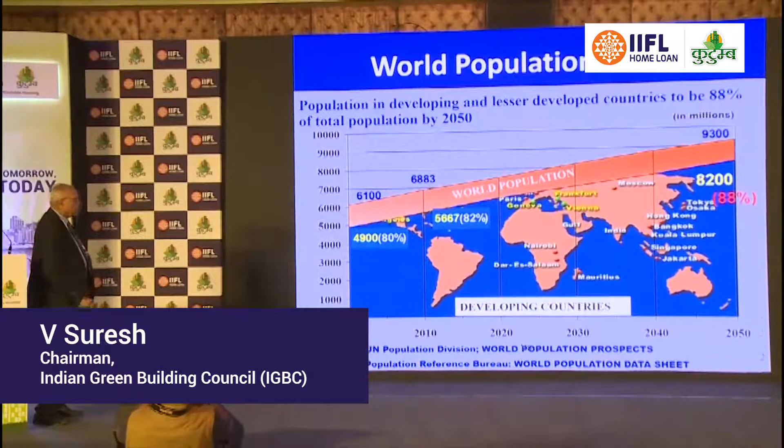We are about 2000, and by 2050 the whole world will be about 9.3 billion, or 930 crores. We are about 6 billion by 2000, around 610 crores. The blue represents all the developing countries where we are sitting, and the red is all the developed countries. Interestingly, the developed countries are going to shrink in population, coming down from 120 crores to 110 crores.

Their family sizes are shrinking. There's negative growth happening in most of the rich countries, whereas the developing countries are going to increase from 4.9 billion to 8.2 billion, which means 820 crores. This is where the problem is, going to increase from a small level to a big level.

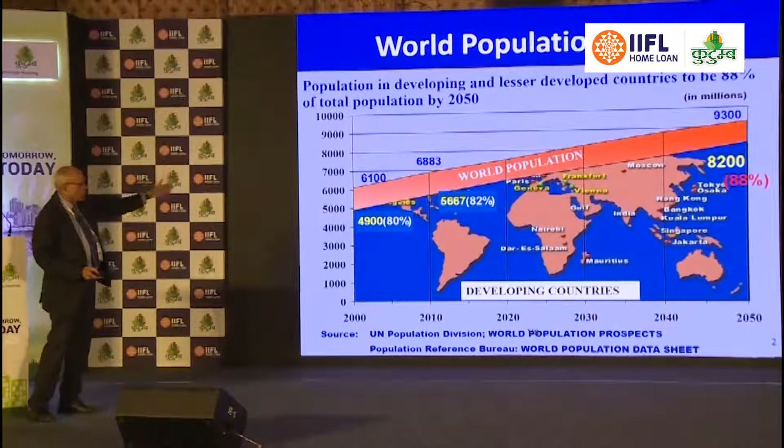They don't need any particular development because they're already rich, they have all the money available. So you've got to find out the type of resources required to deal with housing, water, sanitation, jobs, roads, hospitals, schools, whatever. All these are required as part of the development needs in a very large way.

And India is also coming up in a very large way. But we are amazingly going, the demographic push is phenomenally large. We were only about 100 crores in 2001, and by 2011 we were already 121 crores. We added 20 crores in about 10 years.

20 crores, or 200 million, added in 10 years, and we are going to end at 140. I just saw the population of India this morning. Would you like to make a guess what it is today? Just make a search - we are already 1.38 billion.

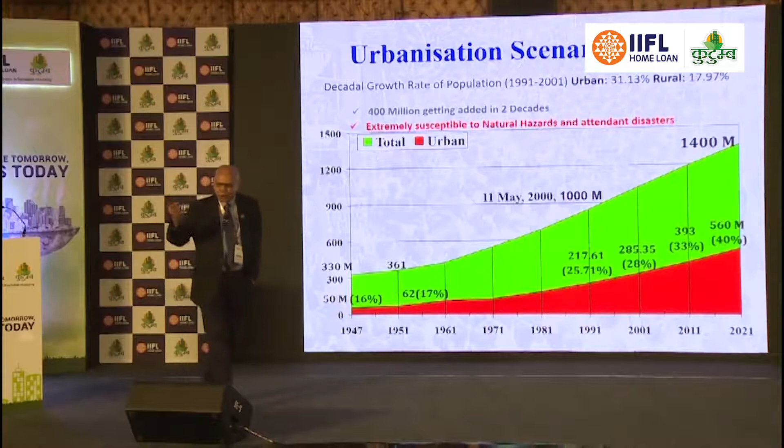We were talking about 121 crores as a good figure for 2011, and we are going to be ending somewhere around 1,400 million, or 140 crores. That means you're adding 40 crores of population in just 20 years' time period.

America is getting 1.5 times that added. America, with all its money, has only around 32 crores, or around 320 million population. What I'm trying to say is that the size is humongous.

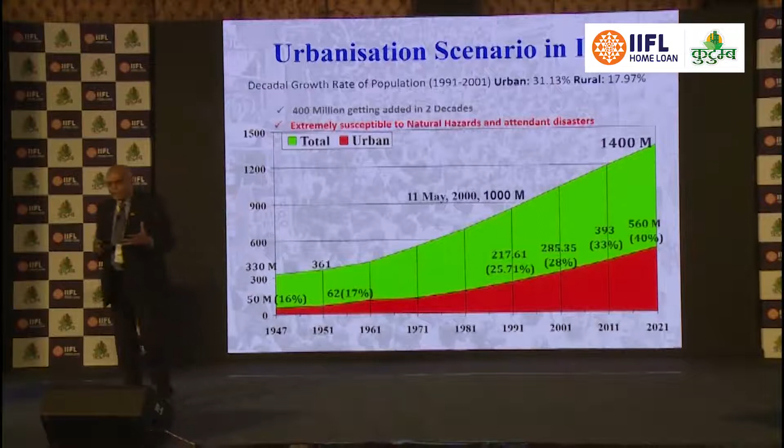The needs are phenomenal, and this is exactly where the urbanization trend is also going in a large way. We were 28% urbanization in 2001, in 2011 we were 33%, and we're going to be about 40% urbanization by the time the whole census comes.

So it's a phenomenal amount of need, adding around 40 odd crores in 2 decades, and also natural calamity and related issues are a major concern area. Some of those details already indicate it's likely to be about 60 crores urban only, by 2030.

This means a lot of money to be put in, adding 2 crores per year. You have to put a lot of buildings, you have to put infrastructure - building alone is not enough. You have to put the water line, the sewer line, the road line, the power line - all infrastructure has to come along with all the building. Housing has a building, office complexes have buildings, hospitals have buildings, schools have buildings.

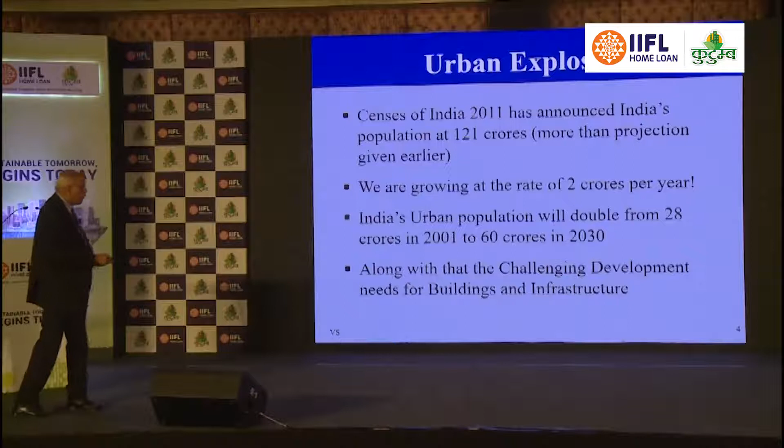All will have to get added on, not just the housing component alone. The biggest contribution is as a growth engine - 70% of GDP, giving new jobs. Housing and services in the urban context are important, and therefore these are also centers of productivity and social advancement.

Look out for all that growth. Chennai will go up, Bangalore will go up, Hyderabad will get into those particular 10 million cities. There are a large number of other cities which are growing. I entirely agree with Ashok in his presentation.

The growth rate is phenomenally high in these zones, and it has already come to 55 as of now. There will be 70 which will be more than 10 lakhs plus. But look out, you've got an equally important component of around 200 cities which are all municipal corporations over 5 lakhs and plus. 5 lakhs to 10 lakhs is also a very major component.

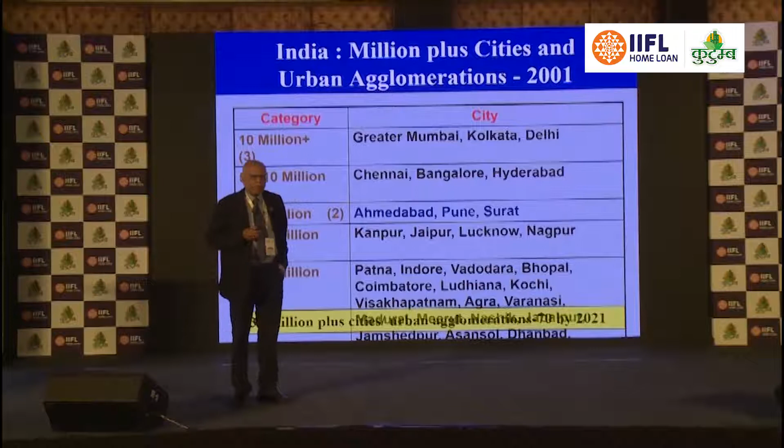So leaving out the 70 odd cities which are more than 10 lakh plus, or million plus cities, you've got to also concentrate on those cities which are 500 plus cities, over 1 lakh plus. That's all where the Amrut cities are.

The Atal Mission for Rejuvenation and Urban Transformation covers 1 lakh plus population, that's 1 lakh to 5 lakhs common, about 200 more than 5 lakhs. You've got a lot of growth opportunities coming in this particular area. Housing is the topic, therefore I'm leaving out all the other components there.

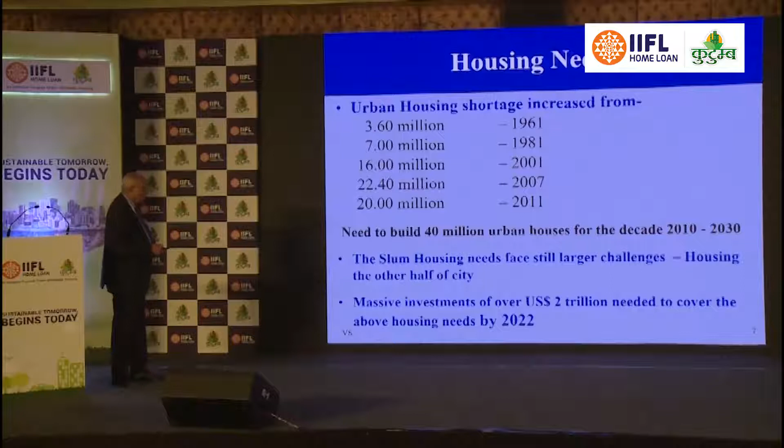We are aware of all these types of figures which are available. So we need to build, of the order from 2010 to 2030, around 40 million odd houses. Slums, the other half of the city, are very, very important. And therefore the type of money required if you want to do housing for all categories will be of this order, roughly about $2 trillion.

Now this is just India's snapshot. 20 million urban houses and 30 million rural houses coming. But out of that 20 million component, only around 11 to 12 million is being taken up by the Government of India under the Pradhan Mantri Awas Yojana, or PMAY, which is for housing for the EWS, LIG, and the lower middle income category.

But the housing for the country is not just that alone. So you provide all the other components also incorporated here. And therefore, as I have been telling often, I don't agree to this 95% figure that all housing for India is only EWS and LIG. I don't agree with that, because all the housing where finance is going is mostly MIG and HIG housing, and maybe a little amount for low income housing.

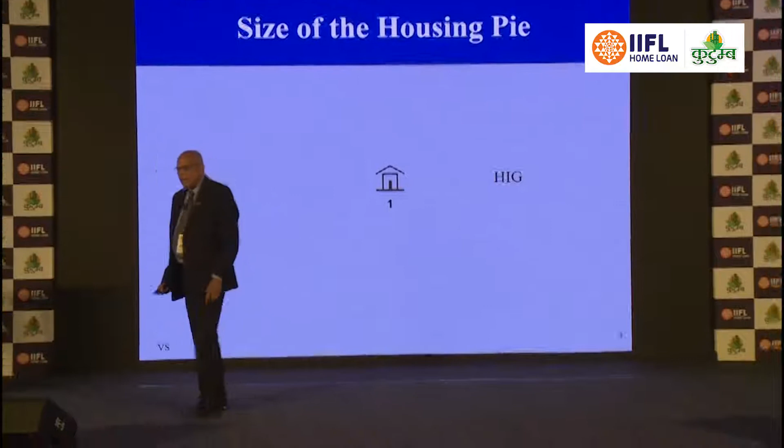If you talk about the 20 lakh crores of money which Monu has rightly brought out today in the presentation, how much of that 20 lakh crores has gone for the EWS? We've got to figure exactly 85% of the 20 lakh crores that has gone by all housing financing institutions, all the banks put together, has gone for middle income and high income housing. It is only a balanced amount that has gone for EWS and LIG.

Okay, so I've got this great data available in India: 10% of the housing, or one house for HIG, 2 houses for middle income, 3 houses for the weaker side/low income, and 4 houses for the weakest. That's 10. So if you break it down, that's 10%, 20%, 30%, 40%.

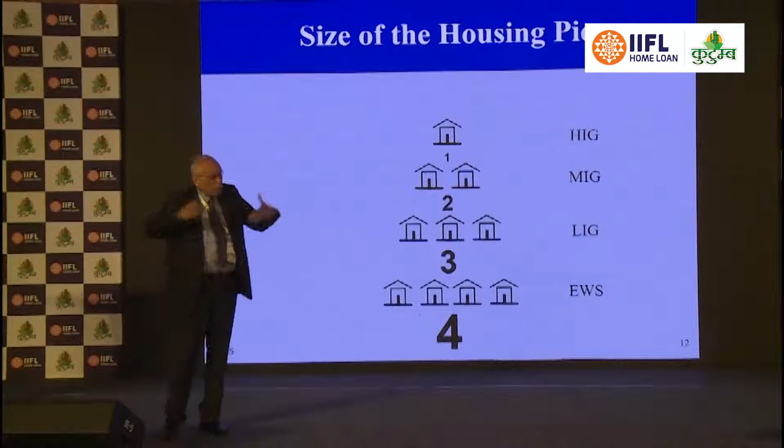I know there's a predominant requirement for that particular component, but the most important component—even this is a very big number—3 plus 4, that's 7 out of the 10 houses where no concentrated effort has ever gone in at the governmental level or any other level.

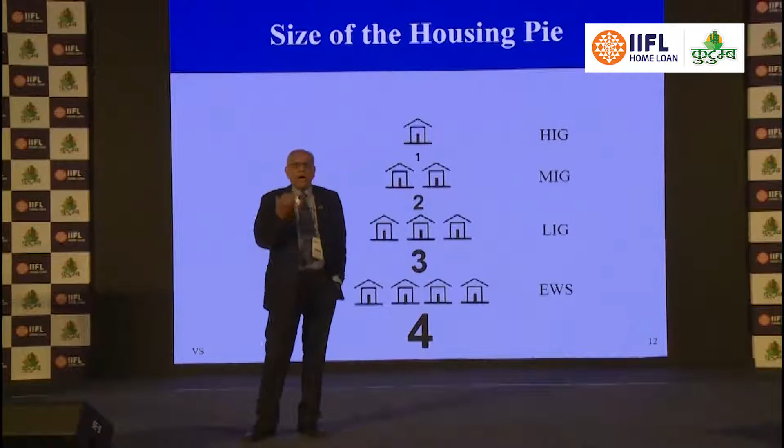Here's a major opportunity where you have brought in about 11 million houses to be done for the requirement of the weaker section and the low income category in a very large way. And that's important, and that's where these slides are very important.

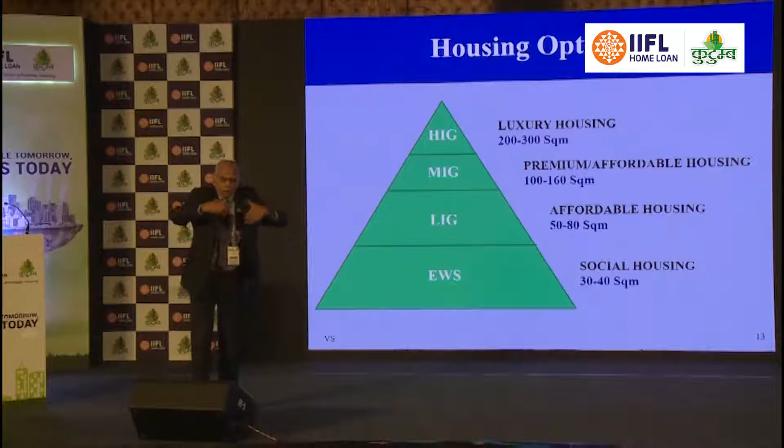A luxury housing of 200 to 300 square meters for high income, 100 to 160 square meter for premium housing that can also be affordable, or the real affordable LIG of about 50 to 80 square meter, and social housing coming at 30 to 40 square meter in this category, where the CLSS comes in. The credit linked subsidy scheme from the government is also dovetailed along with the component of interest subvention coming into the scheme, and that's a very major component also coming in the housing segment.

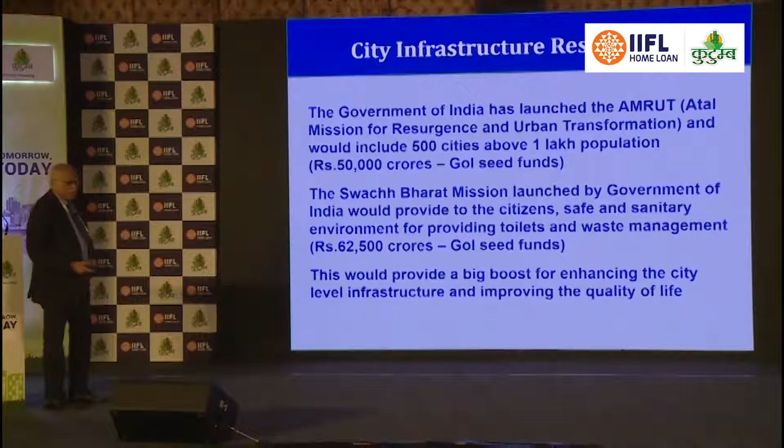Now a lot of interesting things come under the smart cities, also a very major component where housing will be coming in the 100 smart cities. You'll also be doing for the 500 Amrut cities—a lot of development coming, and there also a lot of additional housing will come. About, I told you, 500 cities will come under that particular level. I personally feel that's going to be a very critical area where a lot of housing is going to come.

It's not just Hyderabad, Visakhapatnam or Vijayawada - there are a large number of other cities where housing thrust is going to come in a very large way. And in the real estate component itself, if you see real estate developers putting all their money into everything, over 60% is going into the housing segment. Only the balance goes into commercial, IT parks, recreation, hospitality, entertainment, hotel and retail.

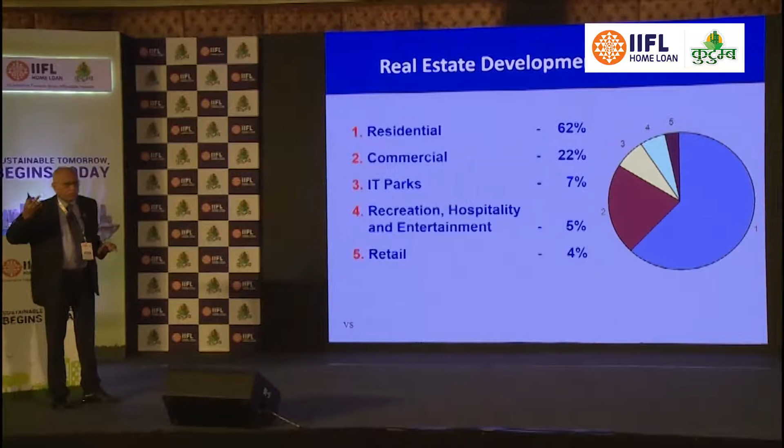So housing is going to be a distinct component even within that, but it'll be good for some of those good developers to have a good mix of all this, and not put everything only in a pure housing basket, because you've got a lot of viability coming in these areas with a mixed group, and cross-subsidization can also happen if you're able to link with some of the other projects in the area.

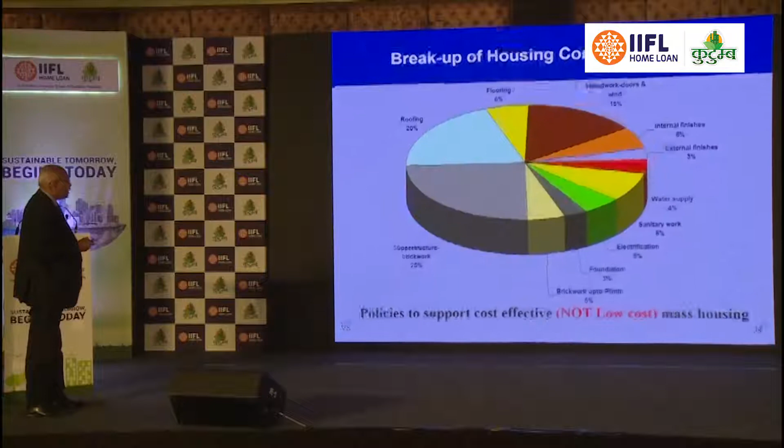Material and components information is already available to everybody, but I'm giving this so you can see where you can optimize. I like the presentation done by Supra - they've gone into very minute detail of where exactly you can start saving. Once you know these costs, the saving component has to be identified from each segment - how much goes for roofing, flooring, woodwork, finishes, external finishes, water supply, sanitary work, electrification, foundation, brickwork, superstructure. So you can really attack on this, and that's exactly what Supra has done.

Hats off to the excellent initiative he has taken to go element by element - how can you really bring it down? Cost reduction is very, very important.

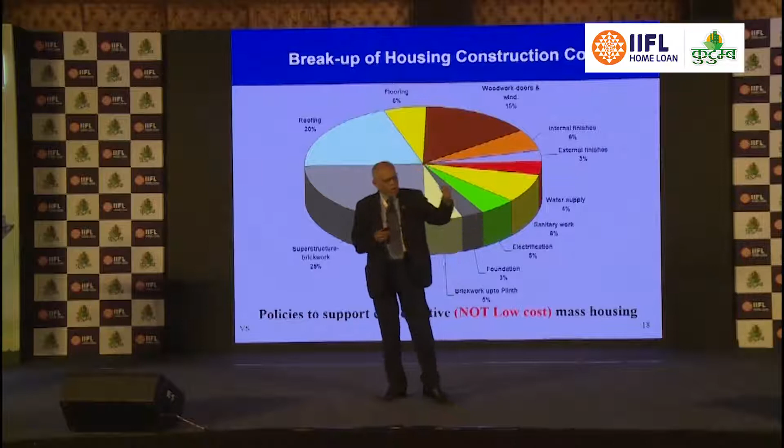We don't want low cost housing, which is a very bad word according to me, because that means low quality, only for the poor - it can be ugly, it can be non-durable, it may not last. What we want is cost-effective housing which is strong, durable, functional, aesthetic, and not an inferior option, but as good as any other option. So what Supra is doing is a super product, and that's the type of initiative we need to take forward - going item by item for each of those things, showing how you can work cost-effectively and not just low-cost housing, in a large way.

Another major area is disaster, and I'm very happy this was already brought out in Monu's presentation. It's a very major problem, very difficult to build houses for the poor and low income - once in a lifetime they are doing that, and once they do it has got to stand the test of time. You see all those problems with earthquake damages, be it Uttarkashi, Gujarat, Jabalpur, or anywhere, all the floods, cyclones, Orissa, Andhra Pradesh, etc.

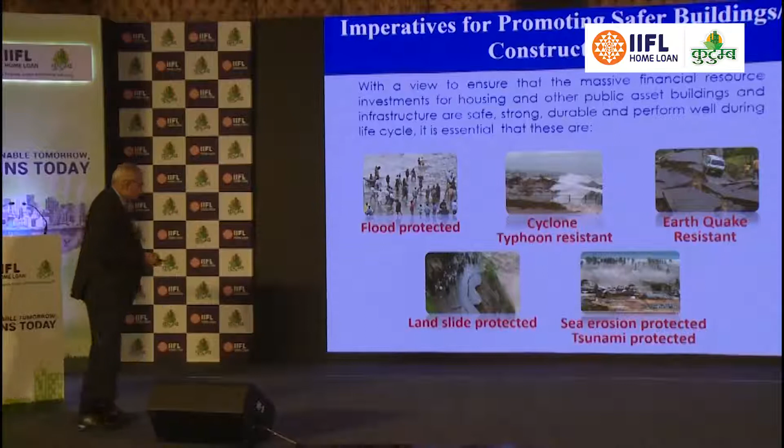So it has got to be flood protected, cyclone resistant, earthquake resistant, landslide protected - very necessary, this disaster mitigation or structural issue. You've got to make that building stand the test of time. The whole country is divided into various geoclimatological zones - seismic zones, wind zones, landslide zones, flood zones, etc. You've got to make your buildings stronger because you can't give an inferior option.

And more so, those buildings are all on a 15-year loan or 22-year loan. We don't want the building to fall in the 10th year - at least it should go into at least a 50-year lifespan or whatever. At least a 22-year repayment period is there, so the house should have at least the minimum life matching that durability. According to me, it should be of the order of around 50 years.

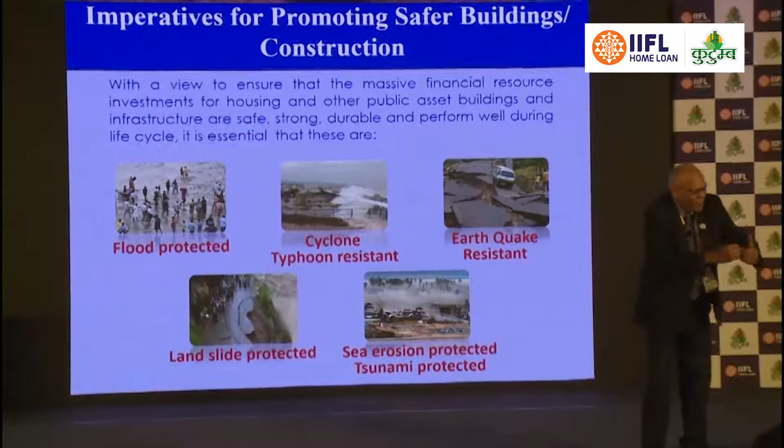It should be the minimum type of life that we should put, because I don't live in the house my father built, nor is my son going to live in the house which I built. So it also requires a generational link on how many years that family will live in that small studio house or whatever - when family size grows, housing choices also will be changing in a very large way. So you've got to take that component into account in a large way.

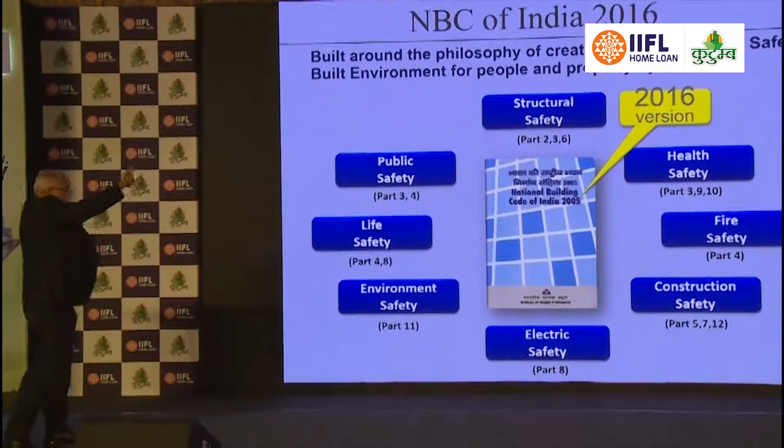All these are covered in a very large way in the National Building Code of India, where all these issues on structural safety, health safety, fire safety, construction safety, electric safety, environment, life and public safety are all covered.

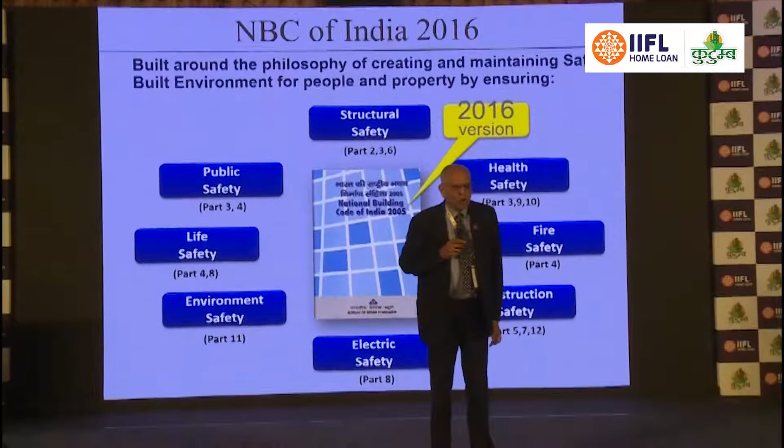Not only that, the new Part 12 is equally important because it also talks of building performance, assets and facility management. By the time the building is complete and you get an occupancy certificate, everyone's gone - architect gone, builder gone, everybody gone. Then I have to take care of this as a person living in the house. You know what I'm trying to say?

So how will it happen 5 years later, 10 years later, 20 years later, 30 years? What will happen to that? Is it performing well? So your important issue of maintenance comes in - your lift has to work, your water supply has to work, your plumbing has to work, your systems of solar power or whatever. To ensure that, you've got a new chapter which says don't think of the lower capital cost, but think of a 10 to 20, 30, 40 year time frame.

A life cycle costing component has come in there - capital cost plus operating cost or maintenance cost together. So would you like to give a finish which can last for a longer period, or a very poor one which will last only for one year? So you've got to take a decision on all your materials - walling, timber, doors, whatever - on how many years it's going to stand.

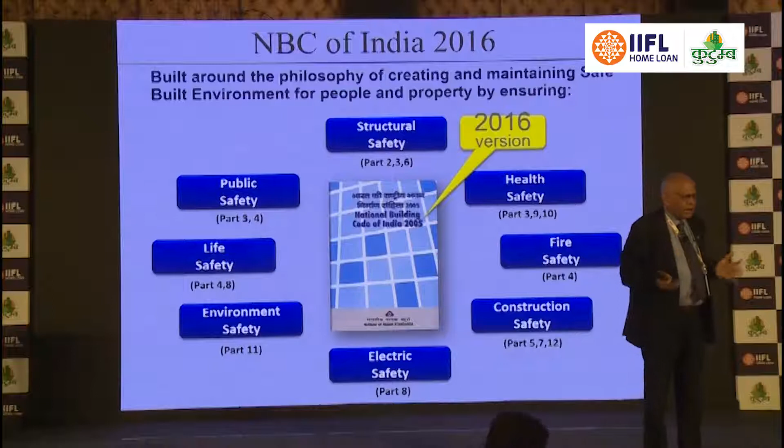And that also needs to be broken down: structural item, non-structural item, finishing item, service item, because each will have different lives. Your services won't have the same life because you change lights or fans or plumbing systems or pipes or wash basins every 10, 15 years - these things will go away. But the finishes, like flooring, will last a little more time. The structural system has to last for a much longer time, so the lives of these things also differ.

So these chapters will bring a phenomenal amount of useful input on how to deal with design based on life cycle costing. That's part of the building code. Normally we don't bother about that - we just do present cost, kya hai. We don't worry about what will happen to maintain that particular building.

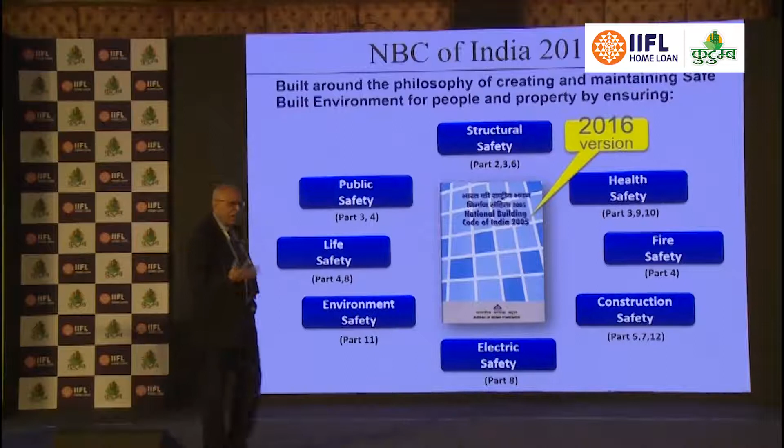So select those specifications in your housing product carefully, because very rarely can individuals who buy a home from a builder continue to maintain it themselves. Especially if it's an apartment, it's not an individual decision - it's a collective decision of 100 people together, or 16 people, or 20 people, whatever. They may not be able to arrange the funding to take care of continuous maintenance related issues. So we have to take that also as an important component.

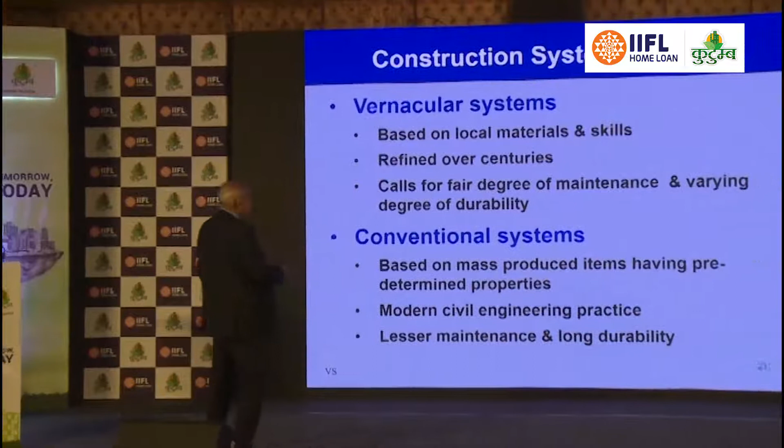Now, technologies are different on that. There are so many cost-effective technologies, the latest ones, which Anil brought up, and we got an excellent example with Supra. What are the conventional things you're doing, versus the Supra option? So comparing conventional technologies and cost-effective technologies - what are the new cost-effective technology options by which you bring down construction cost without sacrificing any functional or performance characteristics? Very important - there's a big list of that.

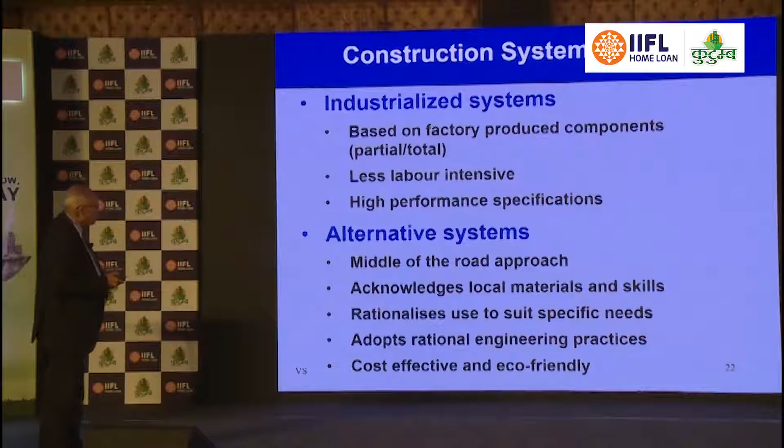It can be a topic discussed for a whole day, but I'm not going into that area in detail. There's a vernacular system using local materials, a conventional system using what we think we can do in the present way, or an industrialized system using factory-made products. Today I went and saw a major alternative system. Each technology will have its own particular option. It depends on whether it's a small town, a village, a medium town, or a big city like Hyderabad - how much traditional components we can use versus technological components using steel, cement, brick, concrete.

This is where we are - we are only able to use the right side of the brain and not the left side of the brain.

Okay, we don't want to get into this particular area. So we need a combination of some traditional options and some technological options. It can be 100% purely technological using steel, cement, bricks, concrete, or you can use some vernacular methods. It can be a good combination of adopting what I call intermediate, cost-effective and disaster-resistant technologies. Very sustainable. That's what really makes it affordable.

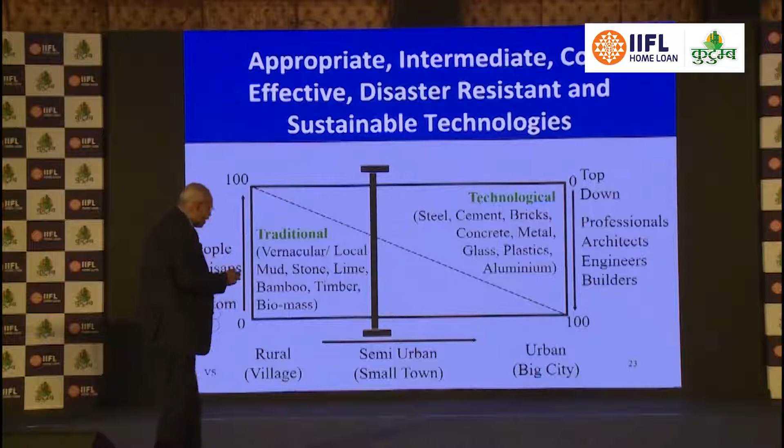And cost is going up. Construction cost is going up year on year. Cement bag, steel bar, your aggregate, fine aggregate, not the onion price. So all these things are going up. The onion price will be at the wholesale price index going up, or the average income might be marginally going up. But interestingly, construction costs increase at 50% more than inflation.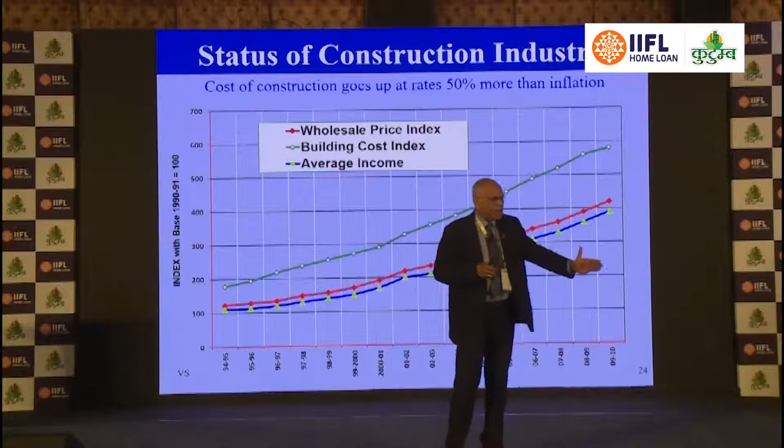If your inflation for your country, for your city is going to be of the order of 4%, 5%, or 6% inflation, your construction cost goes up by 9% annually. Because steel, cement, brick, tile, all the 275 building materials that go into the component are not included. I repeat, not included in the wholesale price index or consumer price index. They are not included. So based on what we have, I kept track on how many years.

So you've got to really see: if affordability is marginally increasing, salaries of people are increasing marginally, cost of construction is going up even larger. So the gap between cost and affordability is widening in a large way. So it's a bigger challenge.

Architects, engineers, builders and real estate builders find it very difficult. Therefore, how do you give a product at a cost which people can afford? Like he said, a sense of pride. No advertisement, I felt it, but people come because it's still within their affordability range. So affordability becomes an important component when you deal with housing in a large way. So you've got to really work on that.

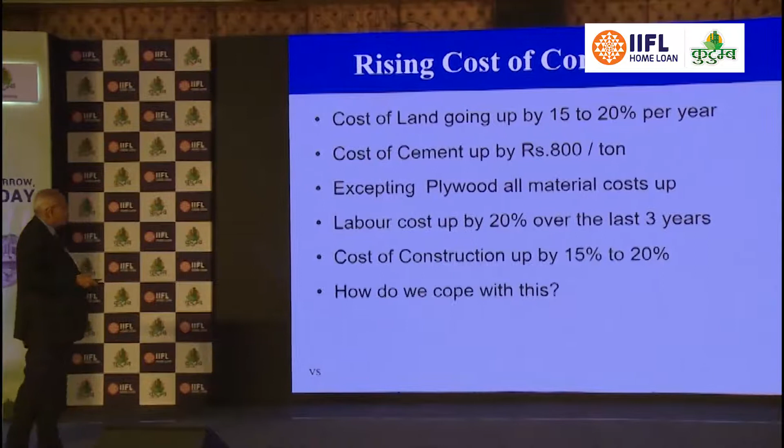Steel, land price going up, cement price going up, excepting plywood, all prices have gone up. Labor cost is a phenomenal component. Construction cost is still going up higher. So how do you deal with that?

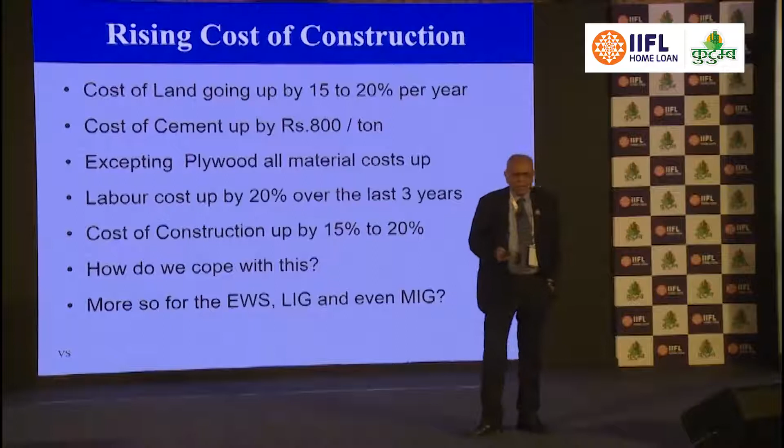Not only did we think the problem was only EWS, even middle income housing has become very difficult. To have a middle income housing going for 1 crore, 1.5 crores, come on, whether it's Bombay or Delhi, anywhere, that's not an affordable home under any sense of imagination. If your average income is only around 1 lakh to 1.5 lakhs per month, or maybe around 12 lakhs to 18 lakhs per year, you can't get into a housing product which is costing around 1 crore or 1.5 crores, but that's the only product available.

So you've got to have a lot of options to bring into this particular area. We've got technologies by which things can be strong, durable, functional - each word has a meaning. Aesthetic, environment friendly, ecologically appropriate, energy efficient, affordable and adaptable, cost effective and appropriate technology for construction. It's easy to say, but that's where I liked the way the presentation came. Some of those options can be there, and I like Ashok's latest technology by which you can make the construction, the walling material, bring in a substantial amount of savings.

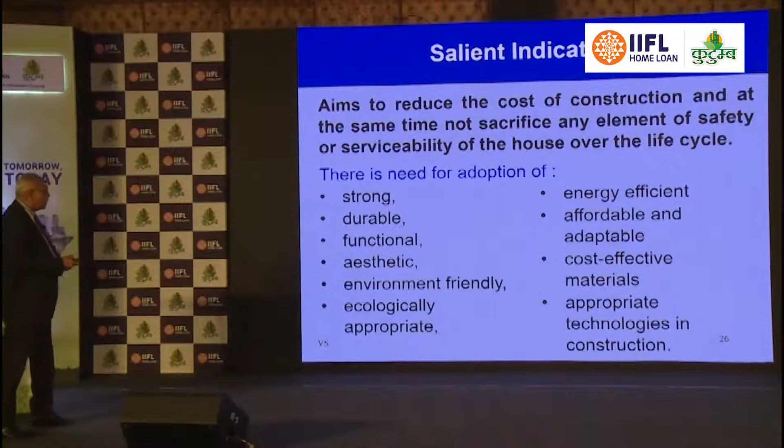Lot of things are there. There are new technology options, I don't want to go into the list there. There are a lot of problems. Aggregate is a very major problem there. You don't get sand for construction. Even coarse aggregate is a very major problem. So what solutions are coming in these particular areas also becomes an important component.

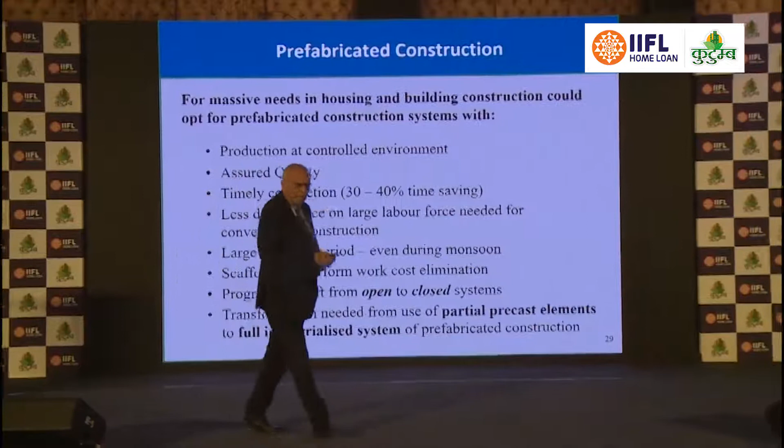Prefab is also catching up slowly. I was today morning from 7:30 to 9 o'clock visiting a project, about a 28-story building in Hyderabad, which is made entirely - all the columns, beams, slabs, staircase, everything is precast, prefabricated, just coming from 550 kilometers away, and they are completing one floor in 15 days. Each of the 28 stories has come up in less than about 12 months time period.

That will also catch up. I'm not fully for it because it's also energy consuming - anything you produce requires a lot of equipment and machinery. Construction is also a way by which a lot of employment is generated. So I'm not for the high-rise component, I'm for the low-rise, high-density component of development.

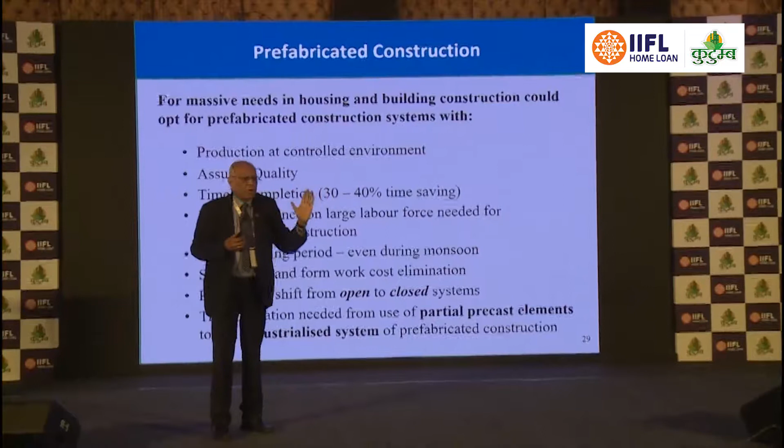Funding is another major component - a lot of interest. I'm happy to get Neha to come into it and bring in some more direction. We require equity, debt, construction-related inflows, working capital, interest servicing, and we require funding at two levels: one is developer level for them to put the construction finance, and the other is required at the level of the home loan individual into retail finance.

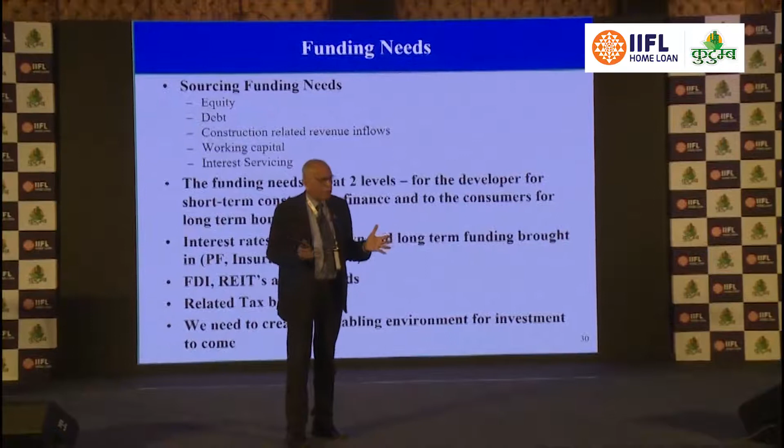I did say how even the 20 lakh crores worth of money that is with all the housing finance institutions and banks - I was just given to say 85%, or 86%, of that money has gone only for middle income and high income housing, and only a balance component has gone for EWS and LIG. And that's where the biggest - therefore I salute you for the type of money that you have put across to the large number of people you have indicated. It's a very major contribution to what I call the down-marketing of credit for the poor.

It's very difficult, not easy to do, because most of these people don't have - as one of the interesting components I liked - most of them don't have regular jobs. So they can't easily show a monthly EMI proof that I have so much amount of money available. It's not easy to do that. So you've got to assess that.

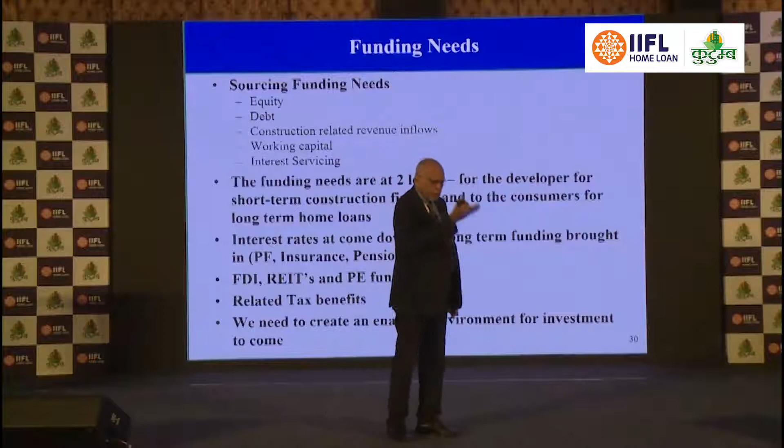Each one of your youngsters, men and women who are dealing with those individual 70,000, 80,000 people you have reached out to, you've got to make an assessment of what their income should be. Because they are in the informal sector, not the formal sector type of jobs. So they don't have land in their name, and therefore you don't have a mortgageable asset. But still, some of them are starting your work - it's not very easy to get into this particular level. So that money is an important thing.

But I'm glad you use long-term home loans. For example, even if you get bonds, Neha, your biggest problem is going to be that all bonds are 5-year or 7-year bonds. India has never had any bonds which are more than 10 years, whereas you have to lend for a long period. Let's say IIFL uses bonds to get resources other than deposits - then you get an asset-liability mismatch between short-term borrowing and long-term lending. So you've got to give back money to the depositors or the bond market, and you really need to see how you're going to deal with that.

Bonds are a good instrument, especially for city-level infrastructure or related areas, and even agencies can take that. But you require access to long-term funds. And one of my pet topics is that just like the US has solved this problem...

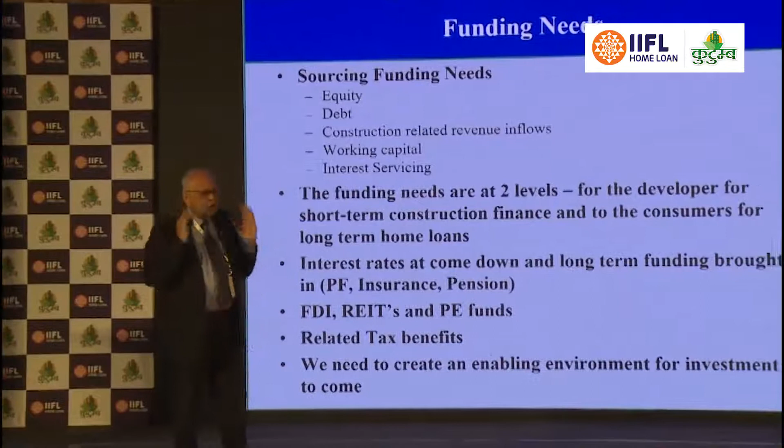Of course, we've briefly discussed how GST has come down - it's already come down in a very large way. From the latest figures, the Prime Minister announced just about 4 months back that affordable housing GST has come down from 8% to 1%, and other housing has come down from 12% to 5%. It's a very major component.

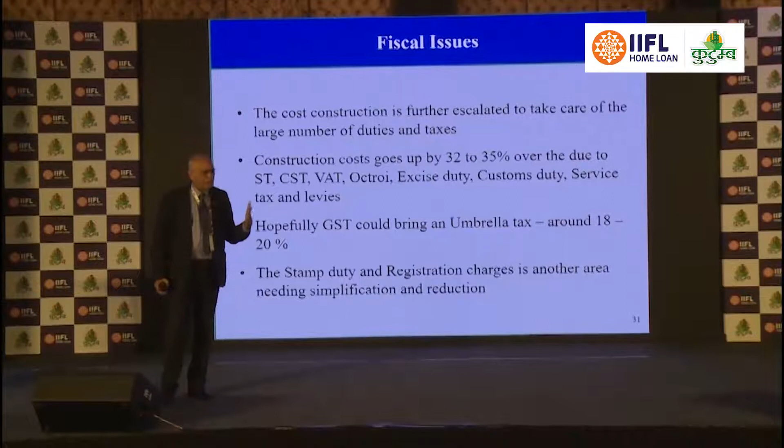Some of the products you mentioned - whether those can be completely off GST, like new innovative products. As Ashok said, we can make a case at the right time, because the budget is coming in February. This is the right time to push all those innovative ideas which could have zero GST on those particular input costs. We can find out those particular areas.

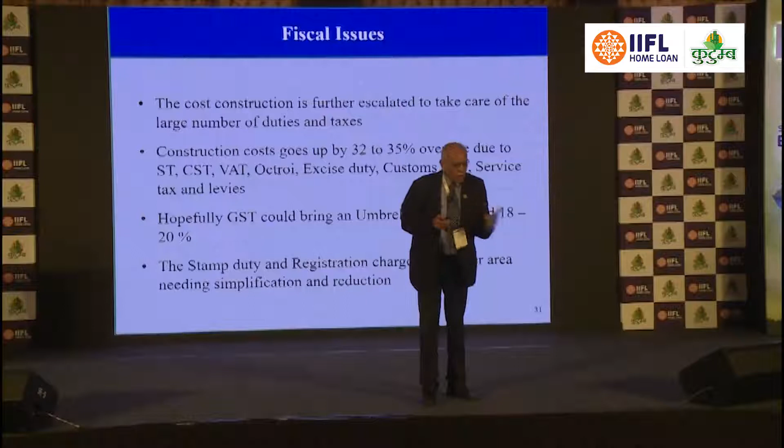No stamp duty required, no registration charge if it is a house up to 400 square feet. Kerala is a good example where there's no registration, no stamp duty for registration. It's a very important document. One good thing is that all the new documents for home loans under the PMAY has to be in the joint name of both the man and woman, the partners of the home. It was not like that before, and therefore that will be an area where registration of the document becomes an important component, and what type of costs can be reduced in that area is also important.

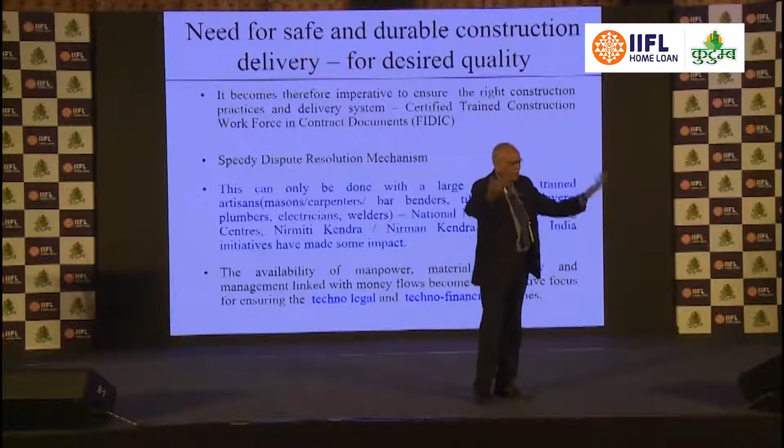Now, a lot of related issues that I don't want to talk about. Our way of doing work through contract documents, the training required for masons, ensuring good quality for doing 20 houses is one thing, but doing 200 houses is different, and 2000 houses means you're scaling up. You're going through the contracting system, and trained workers are not available - mason, carpenter, bar bender, plumber, electrician, all those skilled trades. We have a terrible skill shortage in this area, because quality at the end of the day depends upon all these things put together.

Another thing I mentioned about maintenance and related issues - a good building, as covered in Part 12 of the National Building Code, where assets and facility management are added, you've got to take into account the cost of life cycle costing and the type of requirement to keep the building up. Just like our own body - the exercises we do, the nature of food, day to day, for our skin, bones, whatever - the same thing is happening in the building.

If you don't invest roughly 1% to 1.5% of the capital cost of the building, that has got to necessarily go into housing maintenance and related components. That's why they put a 40-year depreciation level for buildings - at 2.5% depreciation each year, 40 years is the life put for the building to write off. So I'm talking in terms of at least a 1% level, if not 2.5%, has got to be put into this segment.

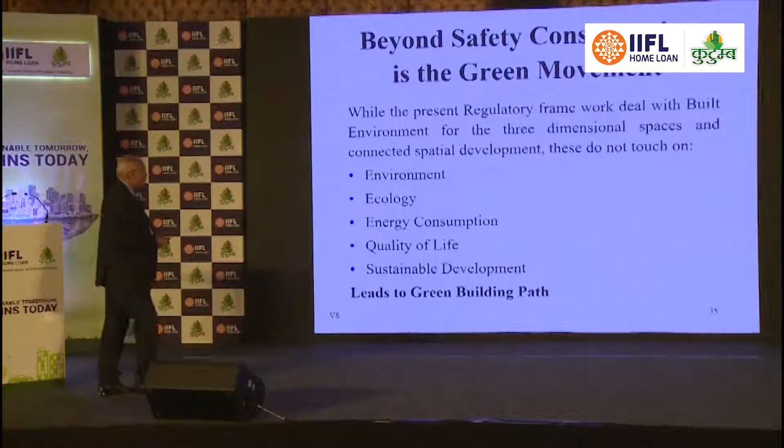Now, if you do all this, good quality will come, good health issues, good safety consideration will come, then you will be able to really get a good amount of projects with commitment from the whole team. But according to me, that's not enough. I talked about all the safety - structural safety, health safety, fire safety, public safety, all construction safety is not enough. You have to go beyond safety concerns, and that is where environmental issues, ecological issues, energy consumption issues, quality of life and sustainable development become important.

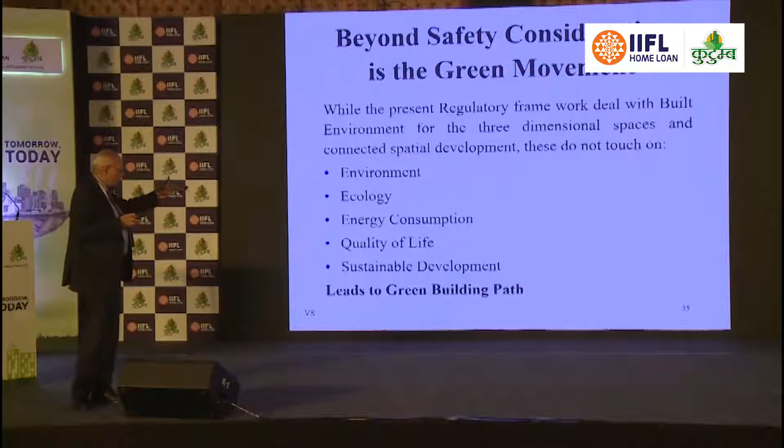And this actually leads us to what you call the green path. The green - we did not talk of green at all. All we talked of was housing affordability, cost of construction was the only thing put forward. And therefore this component comes in. That's where I like Supra's presentation and Ashok directly telling that you combine all those concerns which normally were at the level of only safety and related things, but also the concerns of the green agenda on water, on energy, and incorporate that in a very large way. Let us really go into this path.

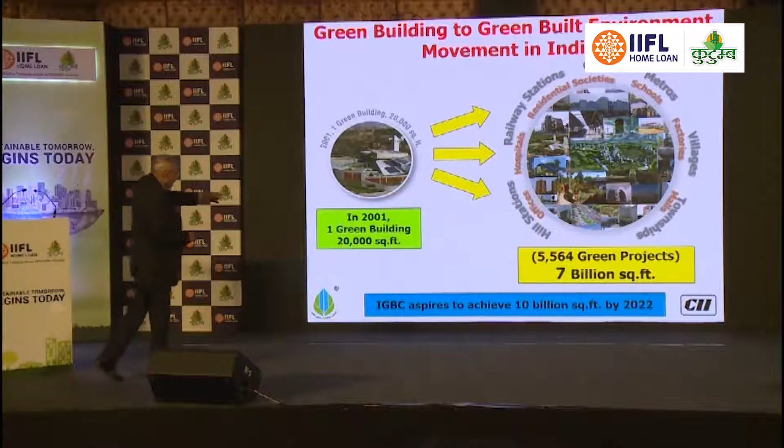What do we do in that? That's where Indian Green Building Council, which we started in 2001, we have come a long way for sustainable built environment for all. We are part of the World Green Building Council - around 80 odd countries are part of that, and we are contributing in a very rich way in this segment. We just started with one building, which was mentioned by Amor - you people should visit that depending on time, because since all of you are from Hyderabad, our team members are all there today and will be very happy to show you the interesting initiative done there. We've come a long way from that one building of 20,000 square feet - today, I'm very happy and proud as an Indian that we achieved 7 billion square feet.

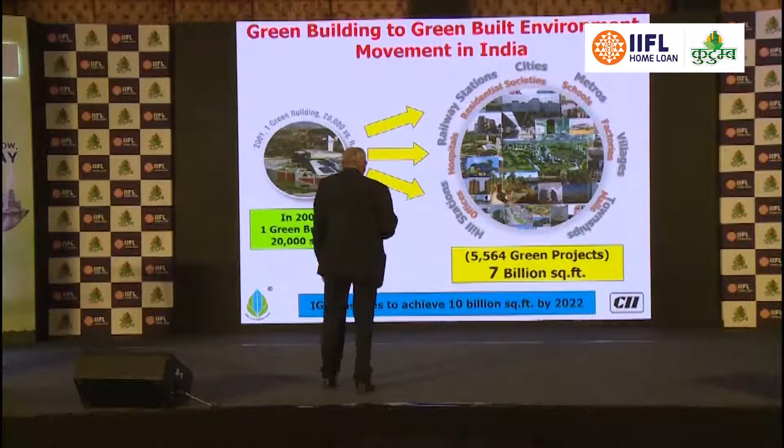That's 700 crore square feet of green footprint that has come with over 5,400 odd projects all over the country, and that's a very major achievement. We are number 2 in the world, and very shortly, by 2022, 3 years from now, when India becomes 75 years of independence, we'll be at 10 billion square feet, or 1,000 crore square feet of green footprint.

That's the type of work we are working on. We have 25 rating systems available. If you see commercial, all your commercial buildings are covered. Residential, we've got 3 rating systems available, I'll talk about that a little later. All your metro stations are a major one, and the built environment is for the campus and cities.

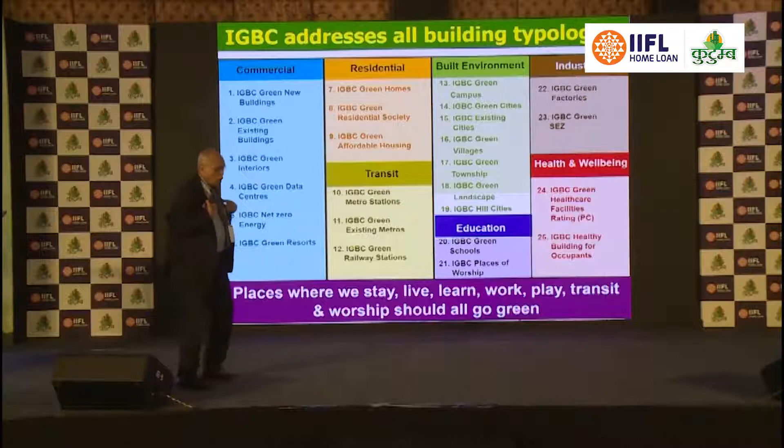We are the first ones who went beyond green buildings to green cities, because all other ratings just rate a single building - platinum or gold. That means on a whole street you might have one such building, a whole city might have maybe 20, 50, or 60 buildings. But imagine extending that to the built environment - a green campus, an existing city, a township, schools, hospitals, industrial buildings, well-being centers, and metro systems all have ratings. So therefore, we are interested in this particular area.

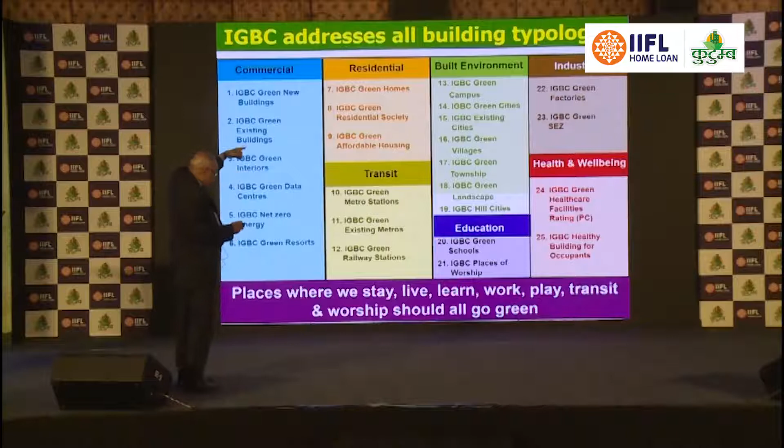So we have 25 rating systems, unlike most other rating systems like USGBC, LEED, or TERI GRIHA, where it's the same vanilla rating used for a commercial office building guzzling energy, a school, or a hospital. We don't do that - we do it separately, because each use of a building has different levels of consumption of energy, water, and other components. Depending on that segment, the rating system has been designed. That's a distinct feature of why IGBC is separate, and that's why today we have 92.8% market share of all green building ratings in the country.

We were the first ones to start, more than 12 years back, with the first rating system, version 1. You can see the ratings and how we've kept on updating the versions. This one is for the green home rating, normally for high income and middle income housing, with a little for low income as well.

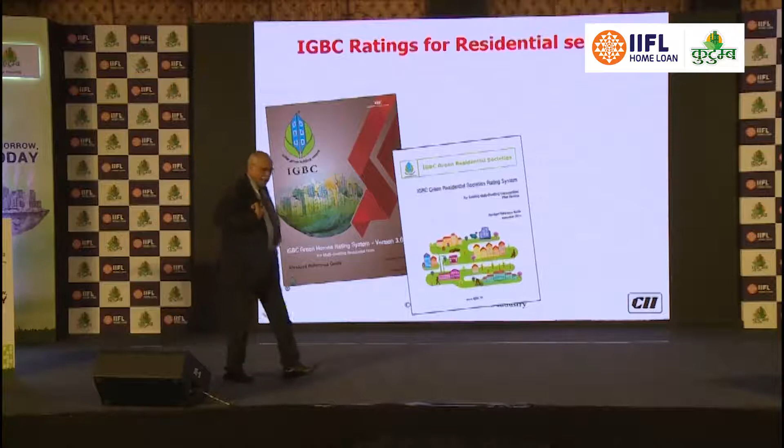But then we got to the next one - those who missed the bus. A residential society that did not go for green at that point in time, but knows it's needed - wants to save energy, save water, have better waste management - but their architect, builder, or developer did not use that. Can I go green now? Yes, the answer is yes.

So therefore, we brought in the second rating, the IGBC Green Residential Society rating system, for upgrading to better water, better sanitation, better sewerage, better energy - whatever retrofitting you can do to make the building green. And that's when the new government came in with a big thrust on housing, looking at the needs of affordable housing in a large way.

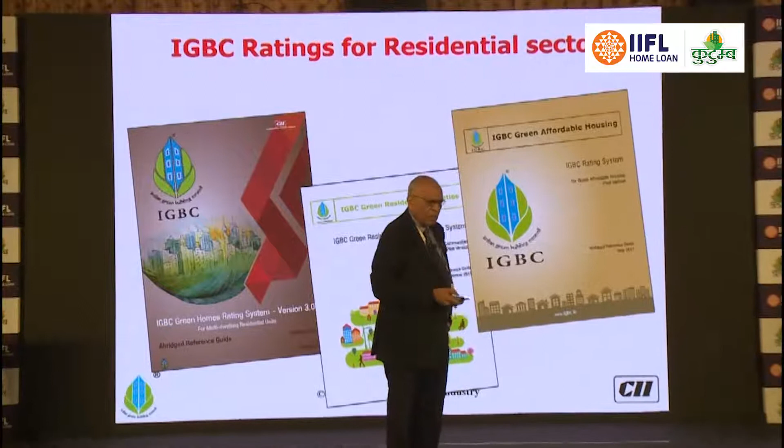So we were the first to bring in a separate green rating system for affordable housing - houses that are 300 to 400 square feet, around 600 to 700 square feet, which normally come under the CLSS credit-linked subsidy scheme, interest subvention scheme, and so on. So we got a separate rating. That means green building rating is not just for the rich and affluent, it's equally good for the poor and low income - even their houses have to be sustainable in a large way.

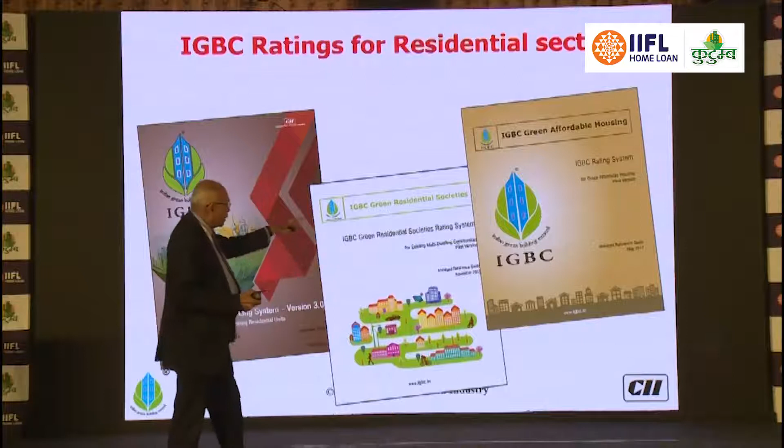I'm happy he showed a 435 square feet house, less than about 40 square meters, how it can be made green. So it's a matter of attitude - if you want to set the right approach to it. This has become extremely, very popular - all 3 rating systems together have contributed to the home rating sector, and we are the first and only one to get into the home rating system in such a large way, covering individual homes, multi-dwellings, and high-rise buildings - all categories of that component.

My colleague said he did not want to make a mention, but you'll be happy to know one of the best names in this is Virat Kohli, our captain. He's built a platinum green home, very concerned about energy saving, water saving, waste management, efficiency to be green. He said don't publicize that, but I'm just making a mention anyway.

Including all the wonderful slides shown earlier of different people, a farmer, a tailor, a carpenter, different socio-economic classes, reducing water consumption. Like Supra rightly said, if you're using 135 liters, I was shocked to find somebody wants to use 160 LPCD for water. Why should you do that?

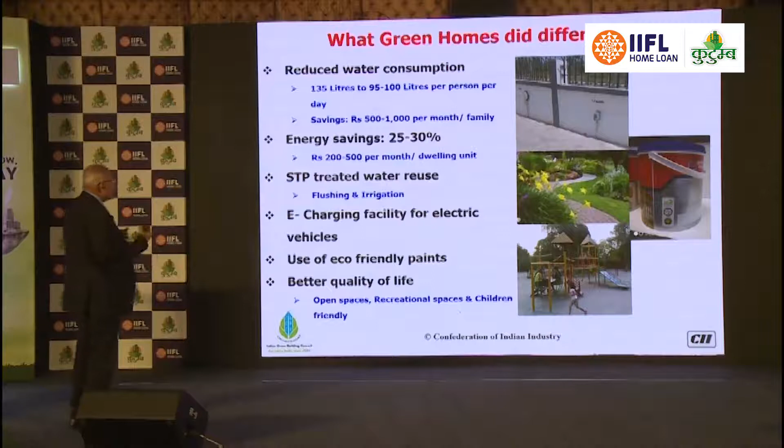Our idea is to bring it down to as low as 95. If you do water saving on flushing, everybody goes 5 times to the toilet, each flush uses 12 liters of water, 12 into 5 is 60 liters just for toilet use individually. If that water doesn't need to be drinkable quality, you can use recycled water, as shown in that last slide, for the complete flushing requirement. You're saving straight away 60 out of the 135 liters of water.

And of course low flow fixtures, that itself is a detailed topic by itself. How can you do water aquifer recharging, rainwater harvesting, wastewater recycling, using low flow fixtures? There are so many things that come in. Supra tried to put some of those components, and Ashok put in what can be done at the larger layout and group housing level.

That's a very major component, energy saving, very clear. How much can you bring down through passive design? I'm very impressed, very happy. At least 5 slides showed how just by architects doing the right passive design on solar path, east-west, north-south orientation, you avoid heat getting into the building while bringing the light in, without bringing glare in with all that glass. You don't need all that.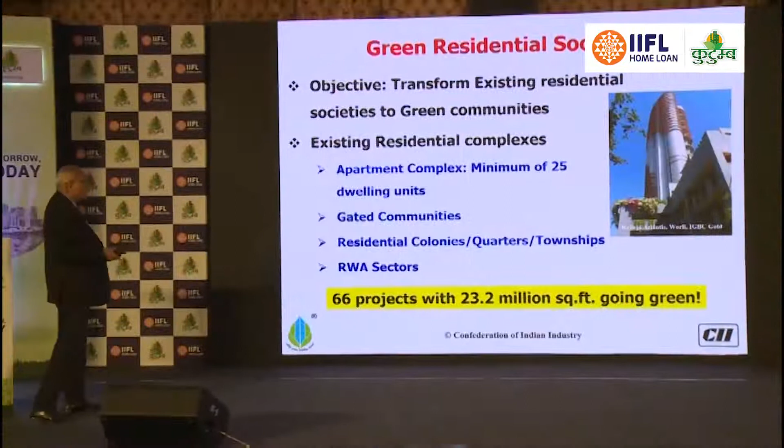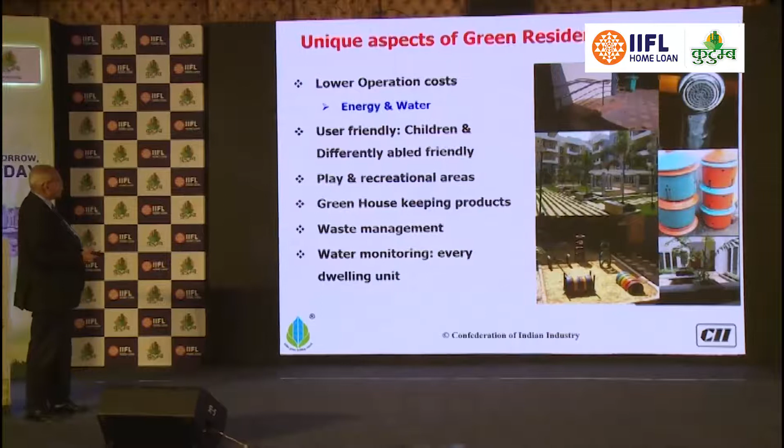Green residential society is a very popular category, transforming existing residential to a better one. Apartment complexes, minimum 25 dwelling units, gated communities, residential colonies, quarters, townships, many PWDs, CPWD, railways - their existing buildings built 20-30 years back anyway require sprucing up, and that's a good opportunity to make it green in a big way. Resident Welfare Associations, roughly 66 projects, 23.2 million square feet have gone green under this rating. Unique societies are user-friendly, children-friendly, with play and recreation space, green housekeeping products, water monitoring, and water meters per dwelling unit.

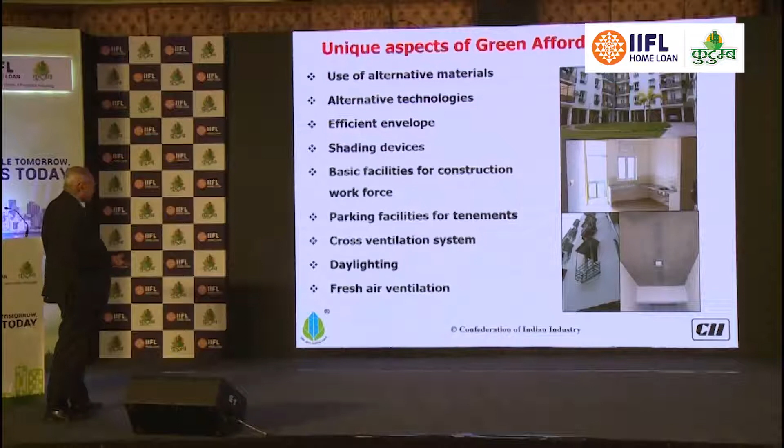These are very important. Green affordable housing is the latest category - we've set a requirement that units less than 650 square feet carpet area come under this rating, with 70% of dwelling units in a project meeting that carpet area. Around 29 million square feet have gone green under this area. There are lots of interesting new components, even for poor man's houses - alternate materials, alternate technology, efficient envelope design, shading devices to avoid heat gain, basic facilities for construction, parking facilities, cross ventilation system, daylighting, and fresh ventilation.

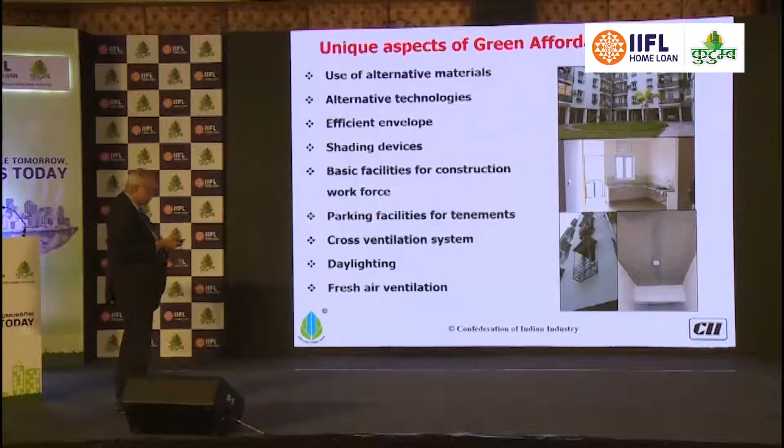These are the basic things. I have put some of those things which Ashok's presentation also brought out, and we have to combine both these things in a very large way.

What I have done is try to put this with no extra cost at all. I don't want to put 1 rupee extra in the name of green. Can I do it? Yes, the answer is yes.

You can do many small things with no extra cost at all. Some of the details are already identified here. Then I put what can I do as a marginal cost improvement. If I am doing say around 800 rupees a square feet, I don't mind putting another 10% more, 880 rupees a square feet or something like that.

If I do that, what will happen? Can you do that? What are all the things that you can do? Normally you don't require water efficient fixtures, but now many building bylaws require that anything beyond a certain size must have rainwater harvesting, aquifer recharging, wastewater recycling.

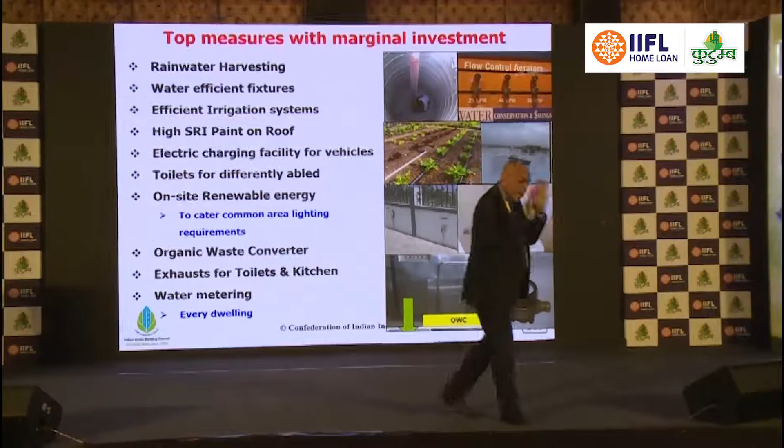So therefore, you put a little extra cost into it. But what is interesting is that little extra cost, the saving you get in energy cost, water cost, through energy, water, and waste management treatment savings, gives a payback period of less than 6 months to 1 year.

Of that order, would that be a good picture? 6 months to a year would be the right figure for the payback period. Less than 1 year, okay, so that's good. That's a good component coming on that.

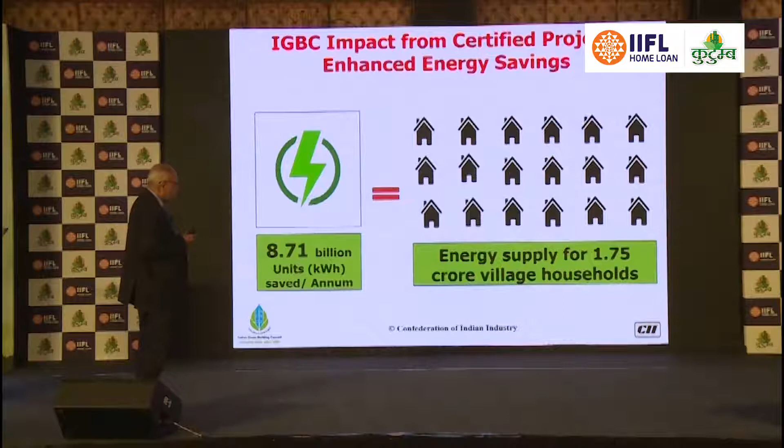Now, as a result of green buildings, we have saved about 8.7 billion units of kWh per annum. This would mean the energy supply for 1.75 crore village households. We have roughly about 6.7 crore villages in the country, and the energy for all those can be saved in this particular area.

On the water saving side, 26.7 billion - I mentioned 30 to 40% savings on all the houses there. That will be more than 1 month's water requirement for Hyderabad. You've said so much about the water problem here, not being able to get water. The saving you can achieve will be of that magnitude for the water related component.

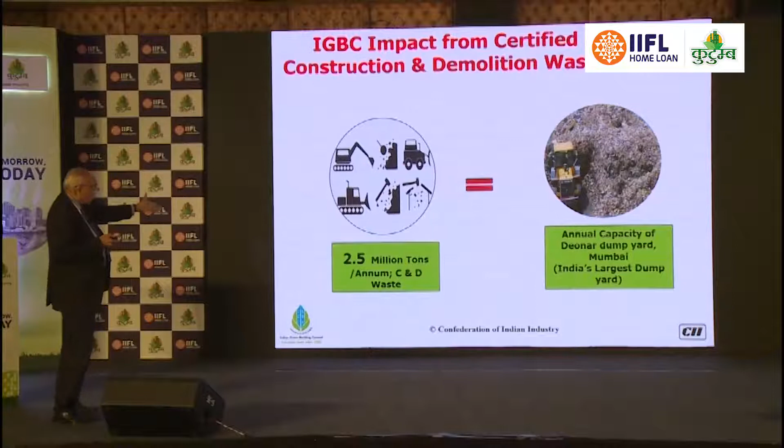So also, how much is the saving on construction and demolition waste? Very major component - where will you take this waste otherwise? The complete annual capacity of the Deonar dumping yard is about 2.5 million tons per annum of C&D waste saving that can come into this area.

And how much is on renewable energy? Renewable energy is a very important component - 100% renewable energy which he has achieved there. Now that's a very major area.

This is where I entirely agree with Ashok, because when you go taller than a 4-storied building, to roughly around 15 stories or 30 stories, the space available at the top of the roof becomes lesser and lesser. His renewable energy count is 100% because he has done a 4-storied building. You know what I'm trying to say?

Otherwise you require a separate solar photovoltaic bank. Many people do that - big developers put banks of that order. Like for the Cochin International Airport, there are 29 megawatts of SPV bank. Many people do 1 megawatt of solar power, not on the roof, but placed elsewhere, and many put it on windows as photovoltaic integrated windows.

I hope you are aware that instead of buying and putting a PV bank on top, you can also integrate it as part of your windows. Israel has done it fully - integrated photovoltaic along with glass windows. Those things are already in place, and that also solves the problem of heat gain, converting it into energy in a large way - and that itself accounts for the whole of Uttarakhand's renewable energy coming out of this megawatt component that we have generated.

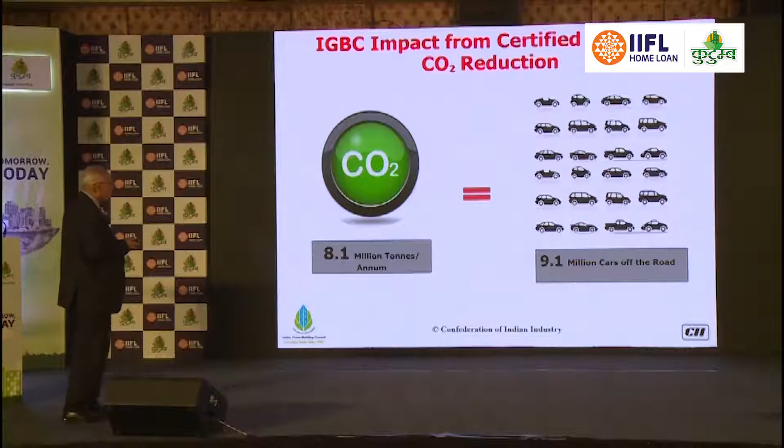Well, we have a lot of chapters to do work, and more important is, since I'm discussing with the housing leading builders over there, we have wonderful relations with CREDAI, wonderful relations with National Real Estate Development Council, Builders Association of India, so that under their wings all those particular people can do this.

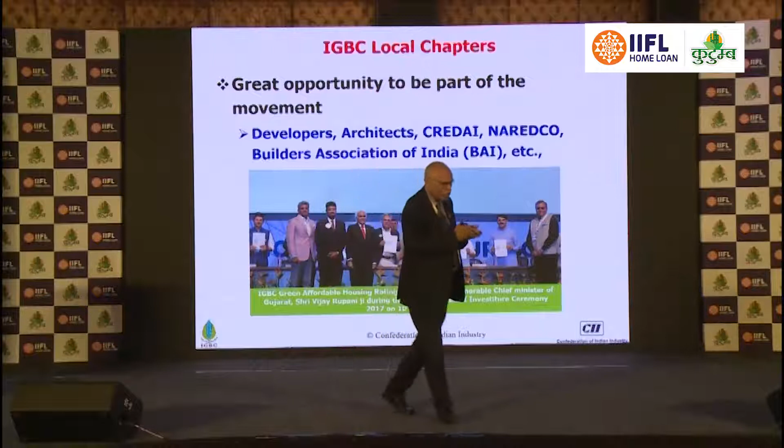But I do agree there's a small little talk going on - CREDAI and all takes care of only the big builders. They may not take the medium builders, small builders, but we have reached out to see how, and I salute you for getting not those big and the medium, but the small builders you have brought in. It's not easy to get them. But first of all, thank you for all your attendance coming over there.

But you have an opportunity also to get into that. As I said to you, we got a special package to deal with the small builders also to come into this particular one. These are all the rating systems that we have done, and we are very happy with the MOU that has been signed with all these real estate developers in a very large way.

Some of those things on orientation which you talked about - the project in Cochin, which has got an extremely solid one, and that's Bangalore by Chandrasekhar Hariharan's good related work which has been done in the homes. Just a slice of that - shading devices, he talked about that, the Pune housing or Tata Inora IGBC gold rating one.

On-site renewable energy is very, very important, and I was happy he also put those roofs in a large way in a project in Mumbai, another project in Pune, into which the green homes come over there.

Design for differently abled is an important component because you have to make it user friendly, and all those features have to be incorporated into your building, be it on access ways or ramps or related components, including on the lifts, etc., where the braille related one or the other related one.

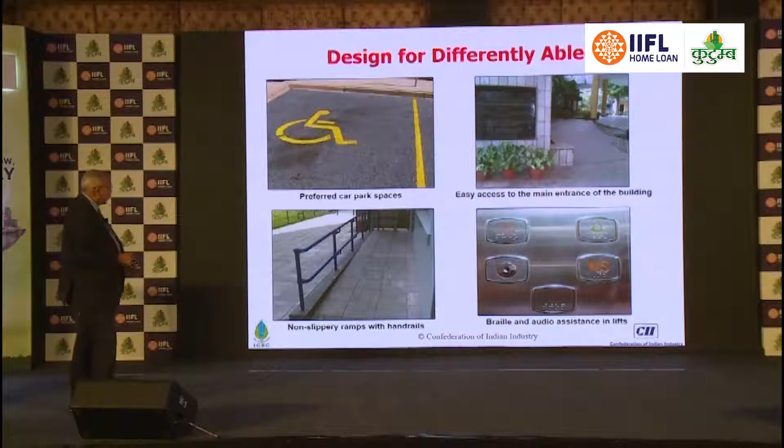And sustainability for residential building means everything, whether it's going to be a Noida project or a Bangalore project or a Kolkata project, Gurgaon project, or it's going to be a project in Abu Road or Bangalore.

And what is happening as a result of all these particular things, many of the states are ready to give incentives. So government of Punjab has done for the whole, Rajasthan has done, Uttar Pradesh has done. They are ready to give additional incentives. You are done well, they're making it part of the green building regulation there.

If you make a platinum, I'll give 15% extra built-up area. I'll give 10% additional if you make a gold. I give 7.5% additional if I go for this.

But states like Andhra Pradesh and Telangana are the first ones which Ashok mentioned. They don't have FAR regulations at all. But you have to show it's platinum.

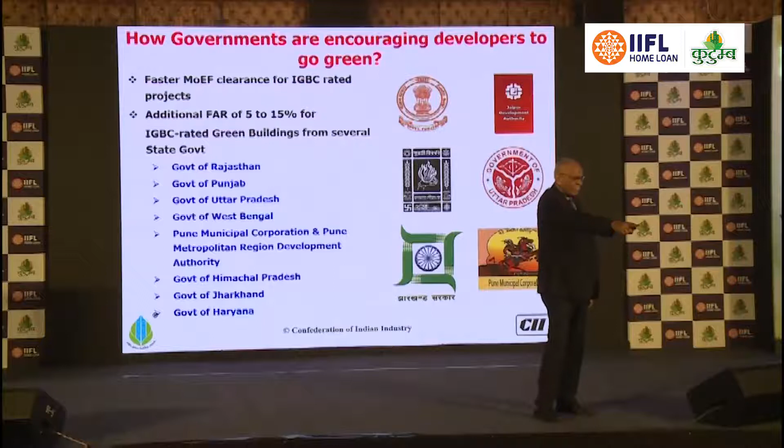It's not - otherwise many people go for rating, advertisement banane ke liye, marketing banane ke liye, but actually when the certification stage comes, they don't entirely put all that. So therefore what you said you will do, are you doing it?

But then the construction starts, that's pre-certified. Then you get the certification coming only when the building is completed. Proof of the pudding is in the eating. So at that time you should see, have you really done what you claimed? That's where the certification comes.

And each certification has a value for a 3-year time period, beyond which you require recertification, only because whether you've done it or not. Because this is already going in the market that it's easy to get a rating and no way to verify. Just like CRISIL rating, ICRA rating, commercial papers also have got a time period after which they continuously keep a watch on that. You can downgrade it or upgrade that.

We also got a lot of cases of upgrading, and I'm very happy to share with you, out of the 4,500 projects, about 1,800 plus are also certified projects, completed in every way and performance being watched over there. And I'm very happy to tell you that in most of the cases, the performance is always higher than what they claim they will do in the project report.

I'm sure I'm putting the right picture.

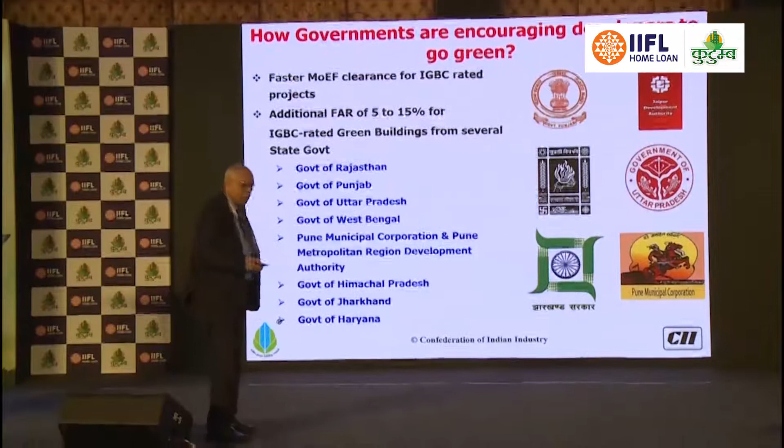There are 5 of them sitting because they keep a watch on this particular thing. These governments, this is a very major thing - that means they're recognizing green building as an important component. Green building regulation has come in as part of your development control rules, building regulation. This position has come: if you do this, I'll give this incentive, etc. This is a very major strength for all of us.

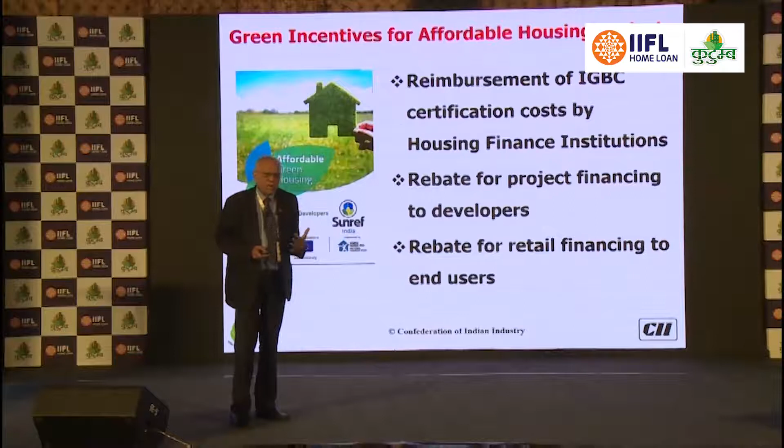Equally important is your own interesting work on reimbursement for IGBC certification costs, rebate on project financing to developers, rebate on retail financing. IIFL deserves to be congratulated for the good initiative you are doing along with the National Housing Bank and various other institutions - it can be KFW, it can be AFD, so many others. This slide indicates that going green is also receiving support from financial institutions in a very large way.

So why do you think Monu has done this big job, spending so much money to get all of us together? If we go green by itself it will be good for you - it's a win-win. But in addition, with financing institutions coming in a large way, they will also be able to give financial incentives in a very big way. I want to salute that initiative.

A good quote from Amory Lovins's latest book on natural capitalism - I don't know how many of you have read it: a green home creates delight when entered, serenity and health when occupied, and regret when you depart from the house. That shows the benefit when you get into a green home - it's not just a little energy saving. See the overall quality of life inside the home, the light, the ventilation, the comfort levels, the space design, etc. - green all round. Ashok captured some of that, and Amory has already covered this in a large way.

We'll do that - one of my own projects will also cover a good comparison. This was for the Hiranandanis, done when I was there for 12 years. We have the low rise coming, the mid rise coming, and the high rise also coming, and I'm entirely in agreement with what you said. We have exactly proved that - there's a big differential coming, and our differential is proved there.

Just for information, the additional cost for a low rise building to go green is less than 0.1%, 0.08% to be exact. When we had the green building movement around 2001, the additional cost for making a green building was 18% for the first building. But now things have come to such a level that residential buildings never cost more than 1% extra, even for bigger houses of 2,000 square feet, etc., because then you get into larger systems, taller buildings, lift costs, etc. For other components it's easily of the order of 0.2% to 0.3%, and we ourselves have done this based on an actual example.